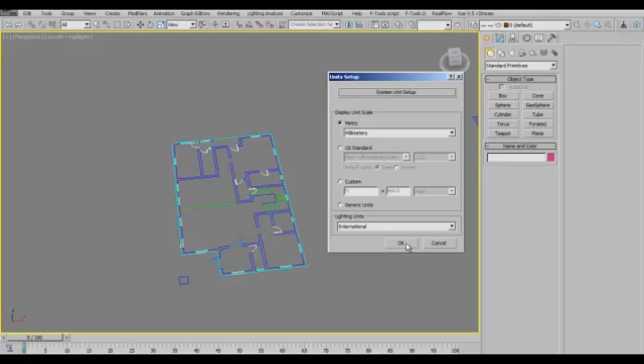Then, we choose to leave this as millimeters, because when we were importing, we had this to be scaled to millimeters. We had our unit reset to millimeters, and we have it fine like that. So whatever we create here, whatever unit comes in, if you're going to create a box, it comes in as millimeters, and you can see it right here. So this is a good thing for what we need.

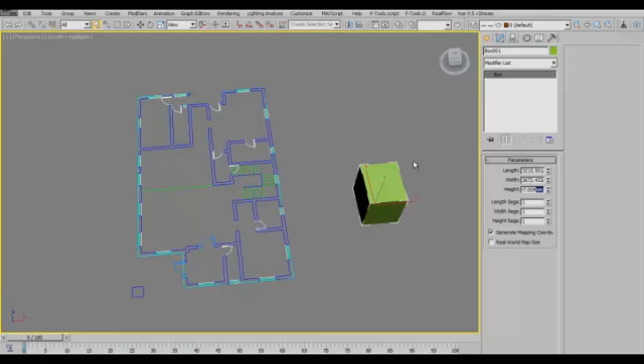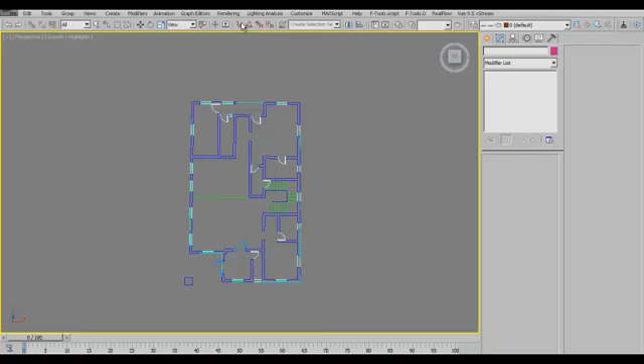Now we are going to start. Yes, I was talking about a few parameters we'd have to set. We'll have to make sure we turn on our snap setting. If you hold it down, left click to hold it down, you see a couple of other parameters here, and the 3 means it can snap to anything in a 3-dimensional space.

Like now, if that thing is in the air, a certain unit above the 0z axis, it can snap into it if there's an object there that we can actually snap to. Then the 2 means it only snaps in the 2D plane, which is the x and y, depending on which viewport you're on. Like now we have the 4 viewports. If you're on a left viewport, it only snaps to y and z. This is the left viewport, and it only shows the plane is this y and z plane, it only snaps to that plane.

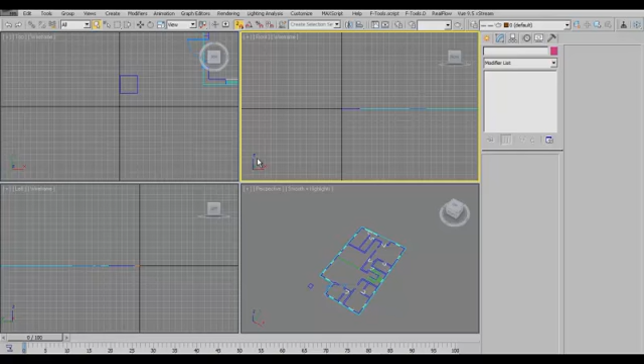And if we are on the front, it only snaps to the x and z plane. I guess you can see it's quite small here, but if you take a close look, you can see what is happening where I'm moving my mouse right now. And now the top view, it only snaps to x and y. But when we come to our perspective view, it chooses the default, which is x and y, actually the one on the ground plane, like our flat plane. So it's going to snap to the 2D plane basically.

And when we now choose 2.5, it's a very interesting and useful one. It comes in very handy when we'll be working on later parts in this tutorial session. It's going to snap to any 3D point, but wherever it's going to drop, it will drop it on the 2D plane.

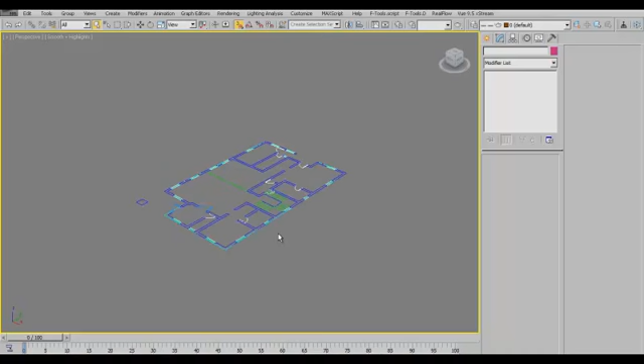Well, this might be a little tricky to understand, but when we get there, I'm sure you'd understand. So right now, let's switch to 3D. We can as well choose 2, because our plane is 2. We're still going to be working on this 2D plane right now, but because we would eventually get into a 3D point without us knowing at that point, I guess we really need to put it on a 3D snapping space. Okay, right now we go to our create panel.

From the dropdown from standard primitives, we choose AEC extended. From our AEC extended, we choose the wall which we are going to use, and a couple of things in the wall we'll have to know. We'll have to adjust our width if it's not done yet, because I've been using this before, so this is already set to 225, which is the default for the thickness of our walls we're using right now.

What we do here, our 9-inch blocks are 225, and the 6-inch blocks, which is the 150 wall, is 150. So for now we choose 225 because our walls here, even every wall is 225, which is the 9-inch wall and all that. And our wall height by default, let's choose 3000 because we always use that as a default. We can have walls of 2400 depending on what the space is like.

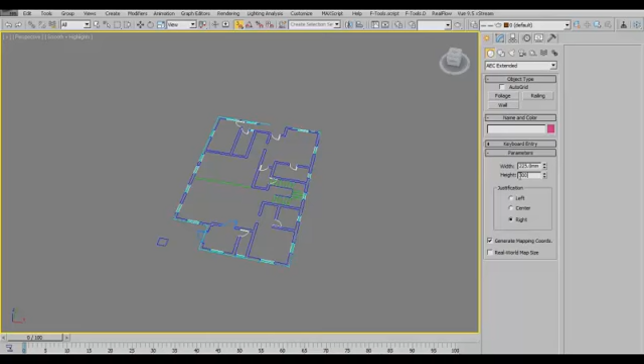So basically we're still going to use this as a 3000, which is a 3-meter wall. Now there's one other parameter, which is justification. Justification is where it creates the wall, where it picks a point, an origin basically for the wall it creates. Let's go to our top view because that's where we're going to be creating from, and we have our snap tool on. That's why you can see that yellow cross that snaps to every point, every vertex point on our object.

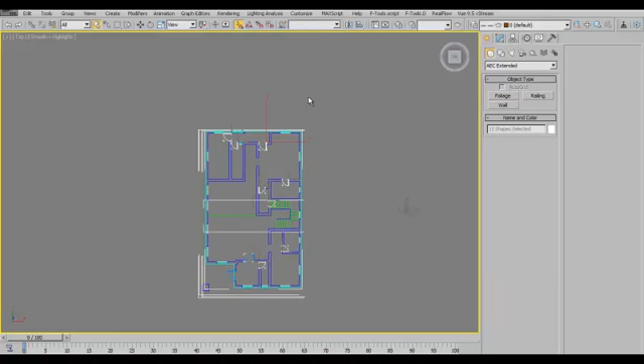Okay, first thing, in the previous part I showed you that you could select this guy and put it in a selection set basically.

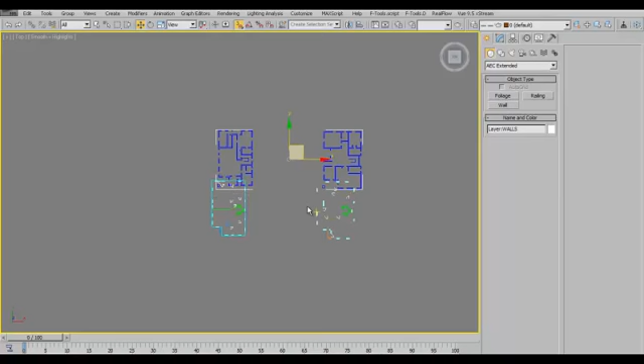One other thing is, because when your scene loads up a lot, you tend to mistakenly pick all these things and move them around by mistake. You don't want that to happen. So what we do basically is we can freeze this particular object. We can tell it freeze selection, but once we freeze it, we don't really get to see all these things clearly, and I think it gets too unclear.

So what we do is, let me undo. Then what we now do to freeze, we right click and select object properties. From object properties you can go to your general parameters tab. Then you now tell it to freeze, but while you're telling it to freeze, also tell it not to show frozen in gray, so it doesn't gray out the frozen object. It just sees it as if it's there and it's not frozen. So let's accept this for this particular object.

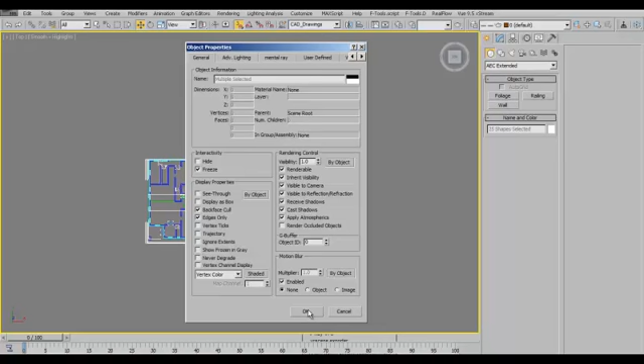So right now you cannot select this guy, and obviously you won't make any mistake getting it to be moved by mistake or something. One other setting that you would not have if you've not done this before is you won't have it snap to a frozen object.

So to get it to snap to a frozen object, you have to right click this particular button, which brings up this dialog, the grid and snap settings. Then you can now go to the options and tell it to snap to frozen, turn it on. By default it's off, so it doesn't snap to frozen objects, so you now turn it on and it snaps to frozen, enabling that.

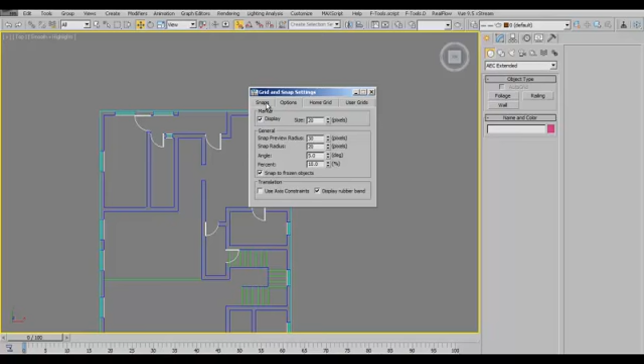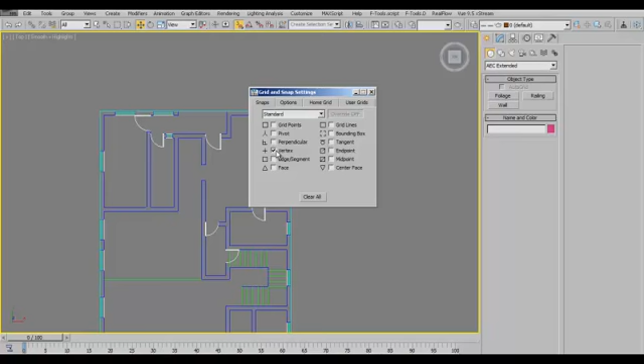A couple of other displays here we'll talk about later, but right now you could just leave as default. One other setting is, by default you have this set to grid points, but what you do is you actually turn that off, then you turn on vertex instead, just vertex, because that is what you need right now.

So you could close this and let's accept all that setting, and that is how you get to snap this guy. Before some people start telling me, no, this thing doesn't snap to the frozen objects, so you'd probably get something like that.

Alright, so now let's start creating our wall. This tutorial is going on for too long. Let's start creating our wall.

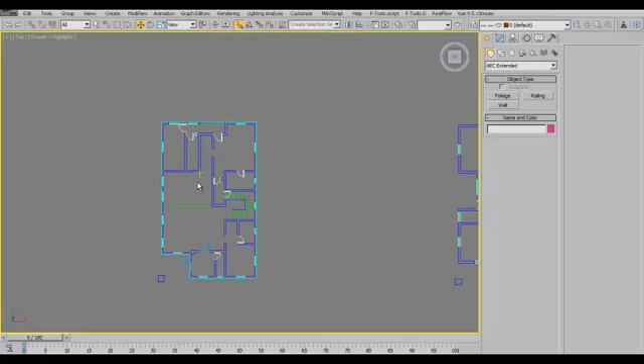Then when we choose our wall, just like we were saying before, our justification, by default you get it to be in the center, which is not very useful for the kind of drawings we have. If we tell it to center, you can see it actually centers the wall, the core of the wall, to where we snap to. So what we want is, we either want to snap it to the left or to the right. I think I prefer snapping it to the right. You could as well just snap it to the left. Let's take a look at what we have.

And snapping it to the left, you can pick from here. Then snapping it, if you pick from here, you can see how basically you can see clearly where it puts the wall, which you don't want. So if you put it to the left, it goes, and fine, we're good. Now you can start creating your walls, picking it, and we were creating the external walls first.

So to pan your view, because you can't pan while you're creating an object in 3ds Max, just like you can do that in AutoCAD. I don't know why they didn't incorporate that feature, but you can do it with a couple of other plugins that could do that for you. But the best way to do it, if you don't have that plugin installed, is while you're trying to move, you press I on your keyboard and it centers the cursor to the viewport.

So wherever the cursor is and you click I, it picks that location and centers it to the viewport. So if you're here now and press I on your keyboard, it centers that position to the viewport. It snaps to the center basically of where your mouse is, moving the viewport to that point.

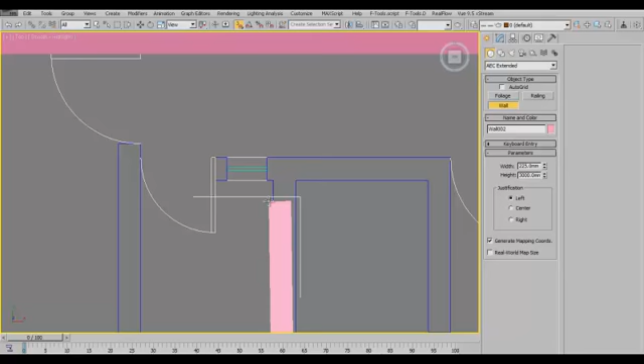Now we have our exterior walls, and the same way we go for all other walls in the scene, the same way we do the interior walls. You click and you start creating. By default you know what to do because it keeps snapping and you know where to get it done.

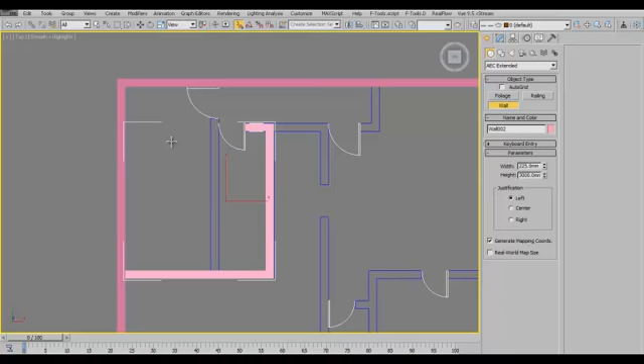I'll leave this as is to show that normally we don't leave any opening open. We close up all the openings, and while creating our walls and windows we parametrically create these openings, and those are the things we use to create our openings. Basically we're actually meant to close up all our openings, we're not to leave anything open, and I'll show you how to get that done.

So right now what I'm going to do is pause this video for a while and come back with a completed wall created.

Now we have our wall completed, and of course I left a couple of mistakes there, so I'll show you how to get them adjusted and worked out. We're also going to show you how to bring the walls together as one, because we don't want multiple walls coming in as wall 1, wall 2, wall 3, wall 4. So we're going to merge the whole thing together, and in the next lesson we're going to show you how to get the walls, doors and windows into place.

For this particular one, we're not supposed to leave any opening, and you can adjust that by picking the wall, selecting that particular wall. Let's turn off our snap. You can see that particular wall, we're going to select it. Every wall has a sub-object level which you can use to adjust various things on it.

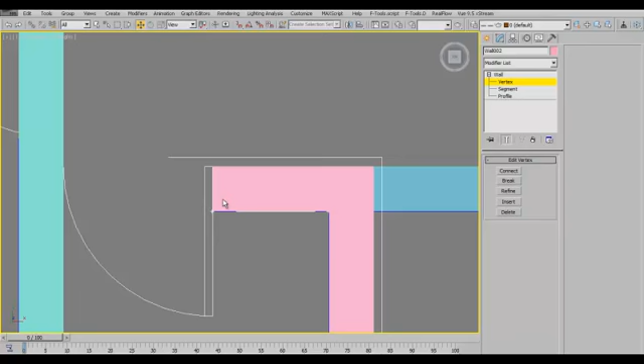So if you pick the vertex, you can see it has that point which it had snapped to, which you used to create it. You can see that small tiny crosshair there, like a vertex that holds the wall. So you can actually drag that and drag it into place.

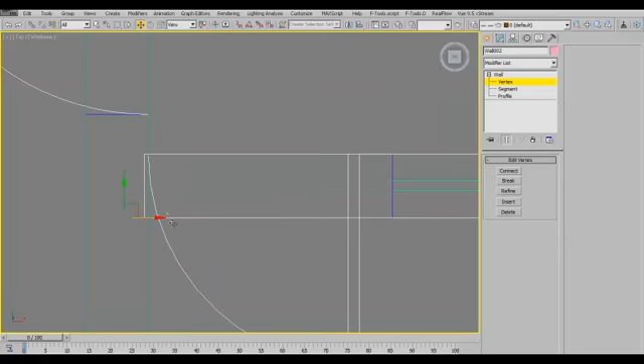If you turn on wireframe mode, you can just drag it into it and place it. If you can't be precise, you won't be able to do that exactly, but you can just place it a little bit inside, and that's fine.

Any other problem we have, we can just adjust, and if you have more problems, you could just post it down there and I would rectify that. You could mail, or post it as a comment, and I would explain how that is worked out.

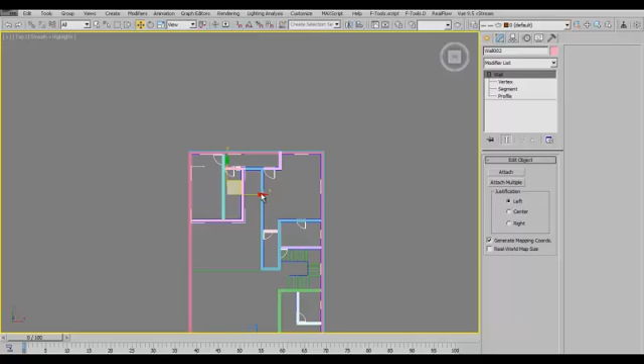So right now what we're going to do is join the walls together, merge all the walls together, because we can attach walls together, and you can see that. You can as well just pick attach multiple, and it brings a drop down. It only shows what it's compatible with, which is just the walls, and you can select all that and attach.

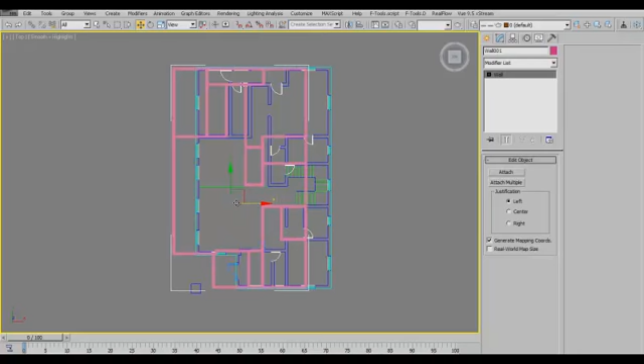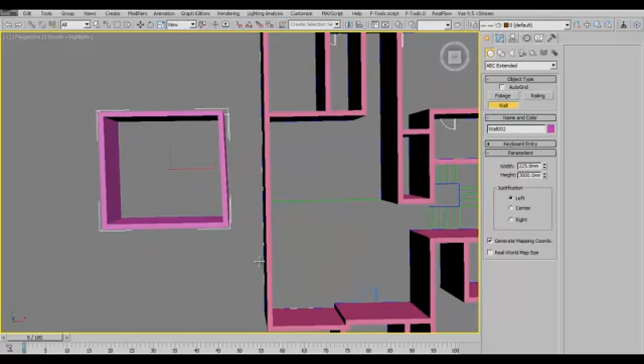Then we have our wall as one single object, which now we can see in 3D. I guess I should have shown you that while creating it, since it does that by default. Let me show you how that is done while picking your points, from the top viewport. You can see that while looking at it in the top viewport, it's actually creating it just that way.

So I guess this tutorial is quite understandable, and you'll be able to come up with something yourself before we get to part 3, which is going to be using our AEC doors and windows to cut in and open our openings with reference points from the plan we imported. I guess this was useful, and stay tuned till I come up with the next tutorial. Thank you.